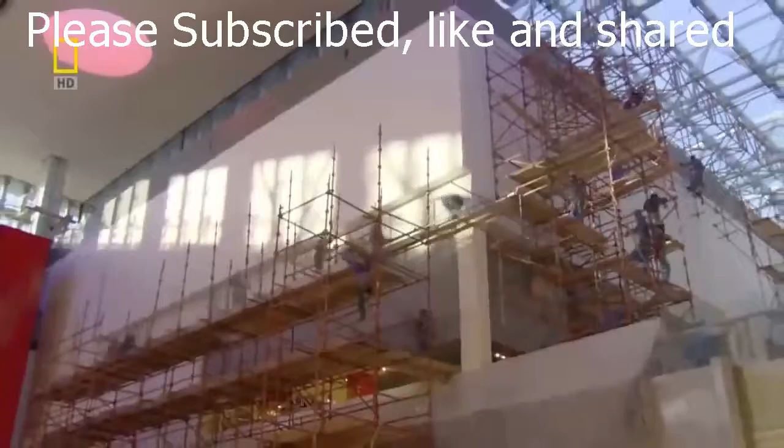He's determined that the mall will open on time. It's already missed 2 deadlines. If it misses a third, well, that's down to him. But of the 1,200 shops due to open here, only half are occupied. Some just haven't been fitted out yet, and some have yet to be leased. What looks to us pretty much like a building site, to Bob is a diamond in the rough.

Nobody goes home until 1 o'clock in the morning and everybody's back at 5. Overall, the entire community has come together to cooperate and give us the opportunity to open the mall. It's going to be very exciting. We're going to have SWAT teams that are set up and positioned around the building. We're going to invite the public to come in. Traffic is going to be a challenge. We're anticipating some 50,000 cars every day.

The thousands who thronged the mall when it eventually opened will never know the real story of those frantic final hours. They would have come to see a mall worthy of Dubai. Opulent spaces and shops, row upon row of them. There's a vast aquarium to wonder at, with a massive acrylic viewing panel bigger than any other in the world. There's a full-size ice rink in a city where outside temperatures can top 40 degrees.

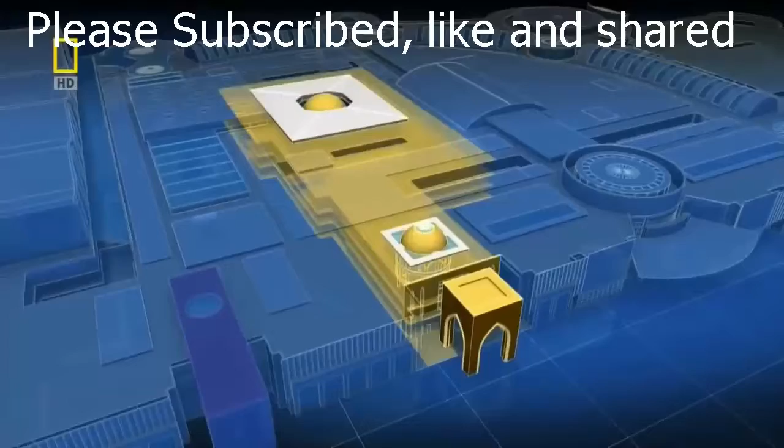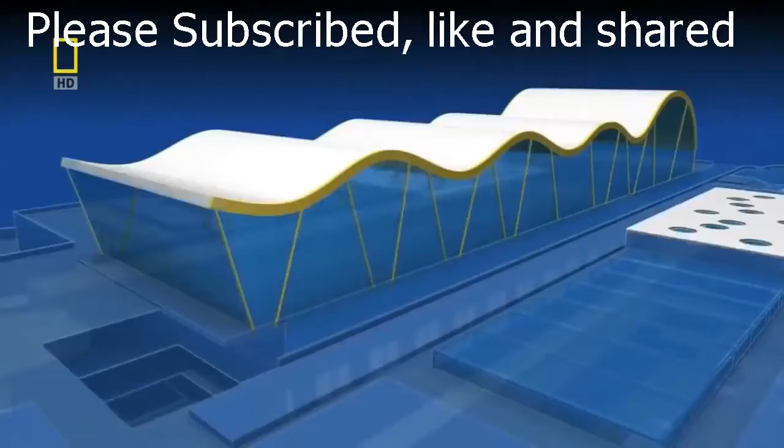The mall is so vast, it was assembled out of 37 conjoined buildings. It boasts an old-fashioned Arabian souk, a world record-beating aquarium, an ice rink, and an entertainment center complete with a roller coaster. Stretching over 1 square kilometer, it sits on a mega floor space that beats the reigning mega mall in China and dwarfs the Mall of America hands down.

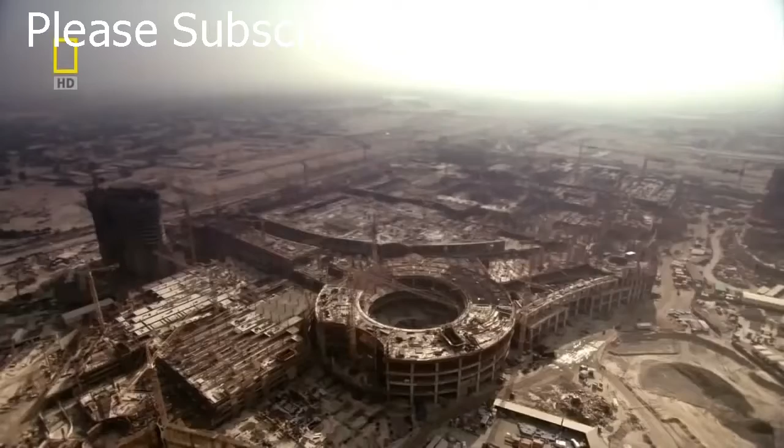Two years back, and a formerly empty stretch of sand is being turned into this retail palace. The project is badly behind schedule. Going by best laid plans, it should have opened by now. Angeline Chan, chief architect, is on one of her regular visits to the huge spaces that she's helping to create. Future ceiling heights for the tenants. Let's go see the precast panels. It's bigger than anything she's yet done. Probably the job of her career, with some touches she's particularly proud of.

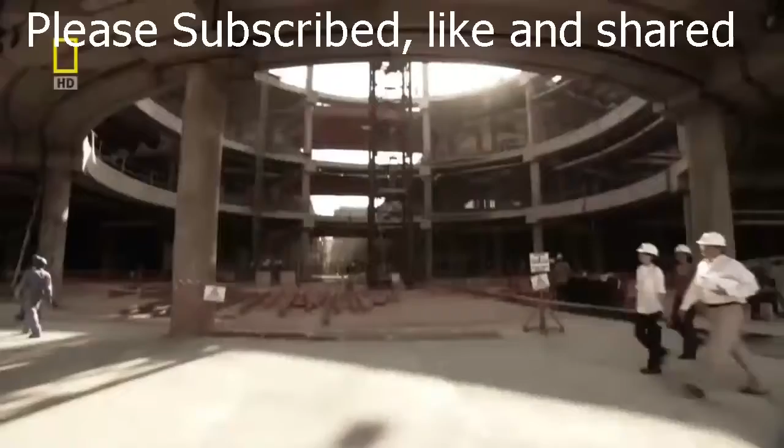I think my personal favorite spaces in the whole mall are all the atrium spaces. The atrium spaces, the 3-story high corridors, even at this stage, when you walk around the mall, and finishes aren't even in yet, you can feel the majestic spaces that surround you. I'm just left in complete awe.

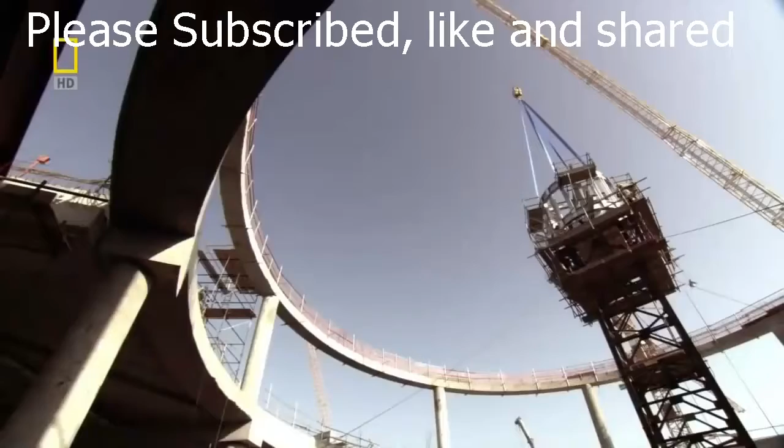There's no time for her to relax and enjoy the view, though. Every time she comes here, there are technical challenges to be faced. The knottiest problem, to get column-free roofs over the vast atrium in place on time. So what's the contractor promising us now? You're probably looking at about February next year for this. The biggest challenge that we had to face is time. We're given the task of building this mall in 28 months.

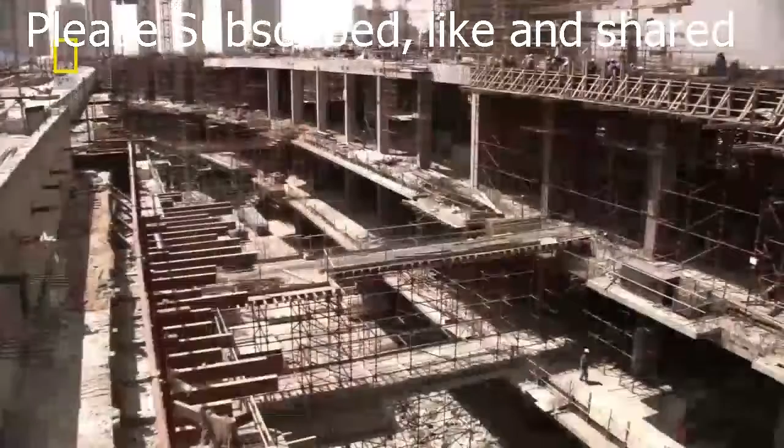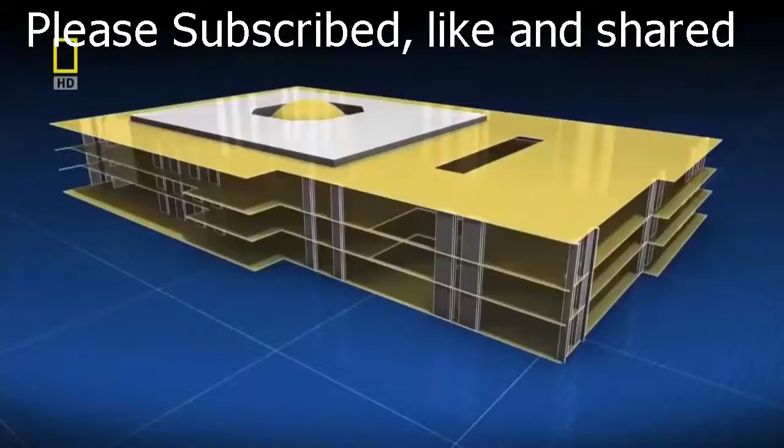Months behind the original schedule. It's not just the open halls that are causing problems. The whole design is throwing up challenges for the architect. The complex has been designed as 37 separate buildings. Local codes say all structures must hold up against earthquakes up to 5.5 on the Richter scale.

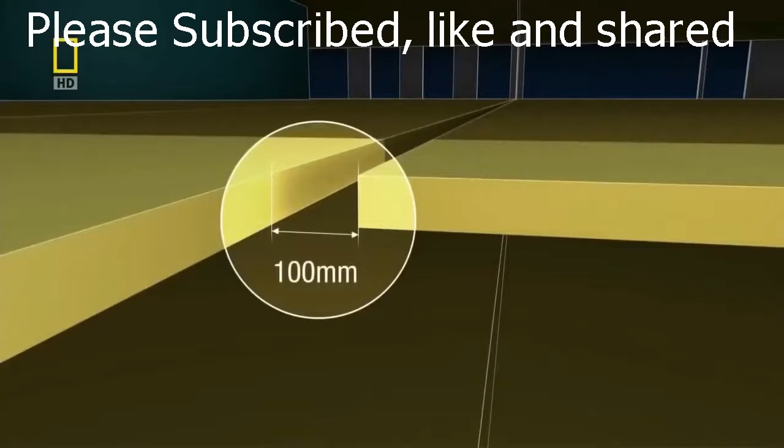So each building is reinforced by shear walls that withstand lateral force. A side-to-side motion won't bring it down. A 100-millimeter gap between each building not only allows for expansion in the desert heat, but if one should fall in an earthquake, it won't bring down any others with it.

While Dubai does not stand in a high-risk area for earthquakes, the disaster in Bam in nearby Iran was felt even here. In 2003, that devastating quake left 43,000 dead, 30,000 injured. Many perished as buildings collapsed. In Dubai, no one is taking any chances.

More than anyone outside the royal family, one man is responsible for the shape of modern Dubai. The Director General of the Department of Economic Development, Mohammed bin Ali Alabbar, known universally as the Chairman. Everyone on the Dubai Mall project answers to him.

So you can give me a discount. Our rates compared to them is very reasonable. We will work together. I appreciate it. I will do all your rates, I need open your book. Open book. I'll do open book with you. Fair? Fair. But the chairman is nothing if not a hands-on boss.

It means he comes up with changes to the design. Today, he's not too pleased with the fountains he's paying top dollar for. Last week we had to decide that we're taking some walls out, some water feature that, in my view and my management view, was obstructing fountain views. We're putting beautiful restaurants overlooking this $100 million fountain. Can you please take the wall down and let them see the fountain?

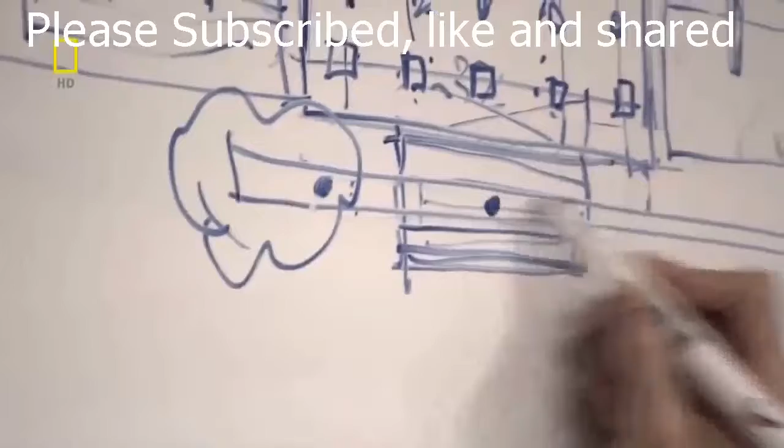Back at the site, Angeline has to break the news to the construction head, Jim Scobie. We've been looking at this for about 6 weeks, 2 months. So it's been 6 weeks? What we'd like to do is, if we can go ahead and redesign this quickly and get it to them. Okay. So the next time we meet Sistra... For a minute there, it sounded like a plan. Oh, really? But there's a catch.

Whatever we design, and we're probably coming up with 3 alternatives, has to be presented to the chairman and all that. Angeline tries to make light of it. No, just do it in between the piers or something. She always finds a way to make the changes the chairman asks for. So it might be some sort of lightweight canopy structure. And you just hang around here, you sip coffee, you listen to the water, this nice sound, and then birds chirping. Today is a good day.

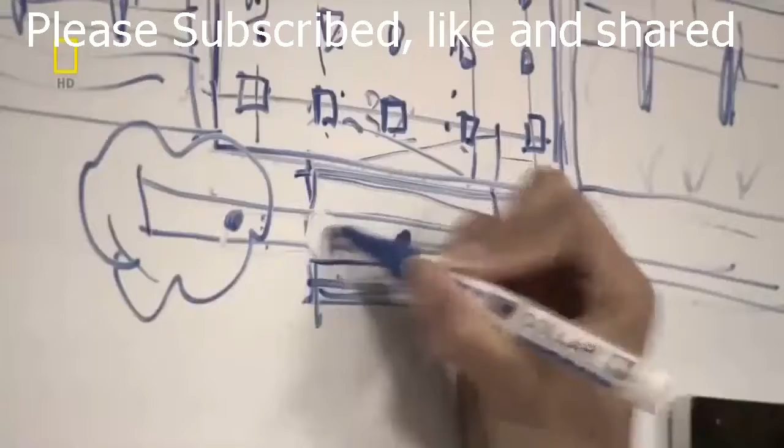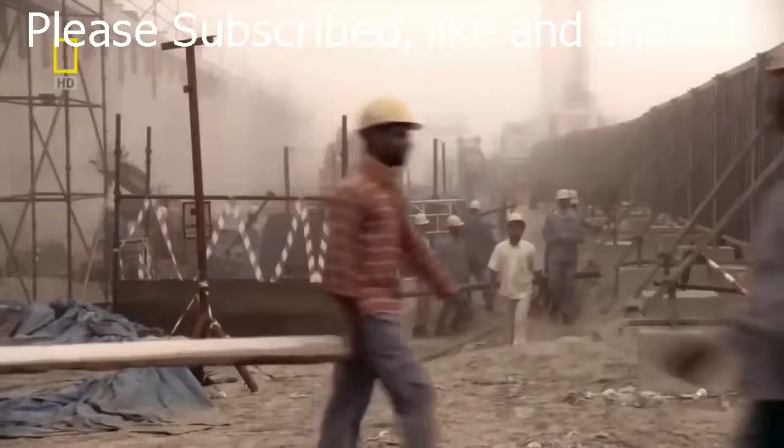Everyone politely goes along. Pretty much an impossible task. People haven't done anything this size this quickly before. And if this wasn't enough, there's a sandstorm approaching. The Dubai Mall, largest in the world. It holds 95 elevators, 150 escalators, with plans to attract 30 million visitors in the first year alone to its array of glitzy shops.

At its center is the aquarium with 400 sharks. In total, more than 33,000 marine creatures can be viewed through a panel so large, it's in the Guinness Book of World Records. The chairman made sure of that.

The size is important, but it doesn't really shake me. But yes, I want to know how big it is, what's in there, how many species. So they say, we've got 33,000 species in this thing. We've got 400 sharks. Say, okay, now we're talking. The task of constructing this monster mall has been an epic. It's still nowhere close to opening day.

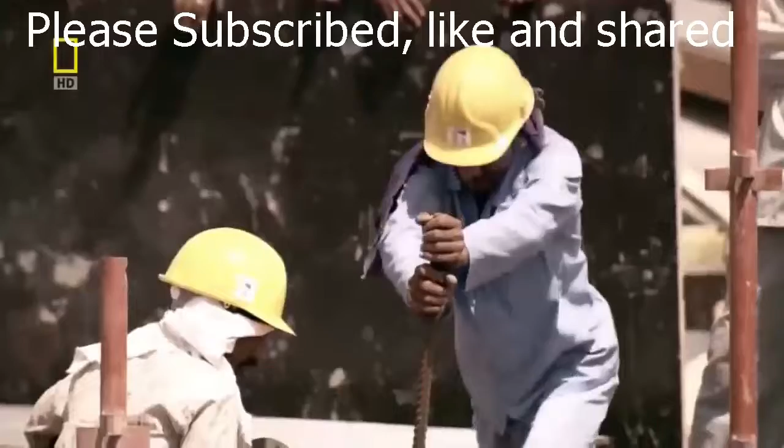Every day, the night shift of 2,500 workers heads for some well-deserved rest. The day shift of 10,000 workers picks up its tools. It's tough work in the raging heat of the unforgiving sun. Temperatures in the desert emirate can hit over 40 degrees in summer. Heat exhaustion is an ever-present danger, especially for a foreign workforce, acclimatizing to the local weather and the demanding schedule.

Currently, the work on site doesn't stop at all. It's 24/7, 24 hours a day, 7 days a week, during summer, during winter. People say, the difficult we do quickly, the impossible takes us a little longer. And that's what we have to deal with here until you say the chairman's coming and then they say, oh, we'll get her done.

The chairman, Mohammed bin Ali Alabbar, is responsible for some of the shiniest new buildings in Dubai. And today, he's coming to the mall for a viewing. He likes to be hands-on. Please, again, I need someone to trim these palm trees around the square. Still, dead leaves are hanging. Yeah? Okay. And I'm very bad. I pick bad things easily with my eyes.

On another trip, he noticed the colored panels on the facade of the gold souk were not to his liking. I think it was maybe a little too dark. So I said, these shades are not matching from the main road. I said, it will reflect badly on us. I think they had to take the panel down and probably replace.

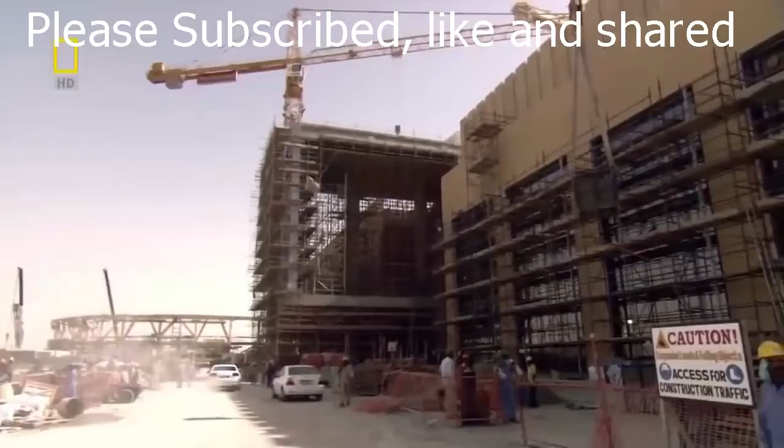Once it's completed, the mall will open onto a boulevard on the scale of Paris's Champs-Élysées. Now the chairman wants to see how the grand entrance to the mall is progressing. He wants to be sure it'll make the right impression. Obviously, his arrival is treated as a bit of an event, and he's ushered to the high atrium just inside the main entrance. It's going to be a highlight. I believe that about the maintenance issues and all the rest, but when we check and they're ceramic, they're going to be very, very nice.

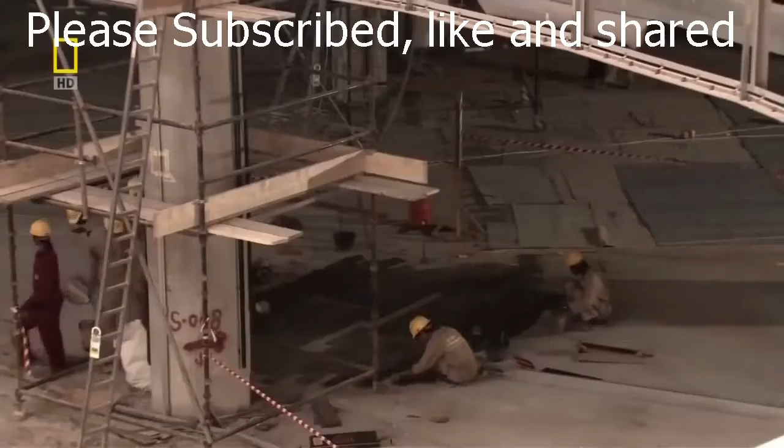He listens knowledgeably to the explanations of the decisions being made. The boss tries his best to be enthusiastic. Also, 3 areas. Then he zeroes in on the details. All your columns are finished one color, huh? Cladding, yeah, cladding. Okay. Thankfully, he doesn't notice anything he absolutely has to change. I think a little bigger would have been also okay. Building 11, 12, we are at building 10, building 15, 23, 26. This is just amazing. As one building.

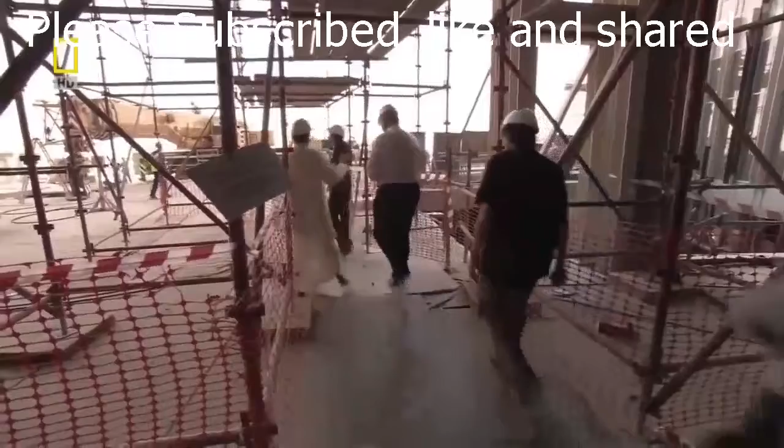Well, I just want to go and shake every small guy's hand. We'll put it together brick by brick. We'll put in the granite floors. I feel like I want to do the opening so quick, and the opening should be for them. Thank you, guys. In another part of the mall, the little guys are frantically rushing for opening day.

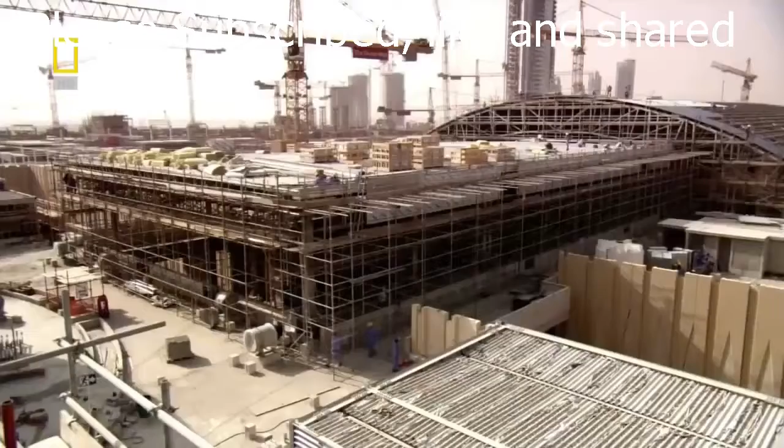One of the most important attractions at the mall will be the aquarium. Once done, it's designed to impress. That means it's going to have to be big. It will hold 10 million liters of water, equivalent to 4 Olympic-sized pools, and acrylic panels 750 millimeters thick will hold back the enormous pressure of the water. By heating and cooling the panels, the joints will disappear, creating a single panel so big, it'll make the Guinness Book of World Records.

The centerpiece of the aquarium will be a transparent tunnel 48 meters long. Sitting at the tank floor, 10 meters down, it will be subject to immense pressures. Iron rings help to keep its shape. It has used up the entire supply of acrylic from 2 factories for a year. It's had to be precision manufactured in 4 massive pieces. And each giant piece weighs 32 tons and is extremely fragile. So moving them requires care.

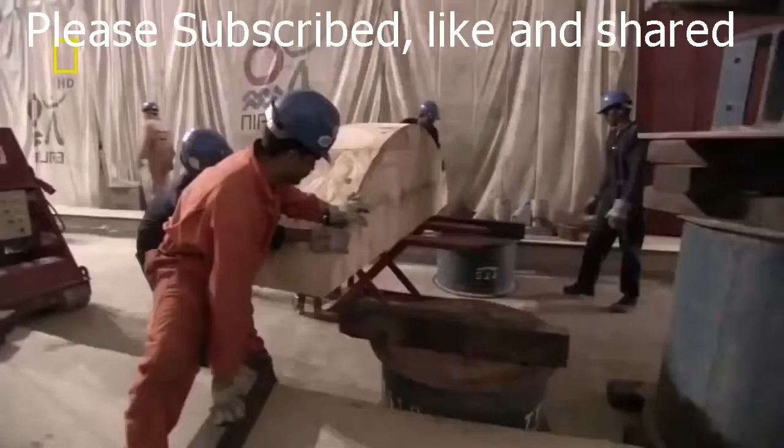A single wooden rolling jack is called in. The plan is to hoist the tunnel in, roll it along, and place it in position. Sounds deceptively simple. The aquarium is the one that we're all nervous about. If something goes wrong, the lead time to fix it means going back to the manufacturers. They're in different countries and they're many months away from reproducing and reissuing. See the play gap inside in the wheel.

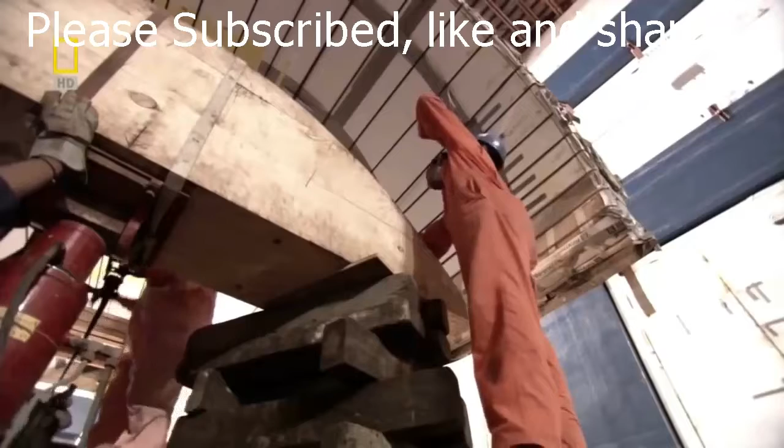It's all done under the watchful eye of manager Peter Knapp. It's the first time anyone here has attempted anything like this. Everything is done in slow motion. Even with something as large as this, there's little margin for error. The skilled workers build up the supports to level the jack before it inches up to take the weight of the tunnel.

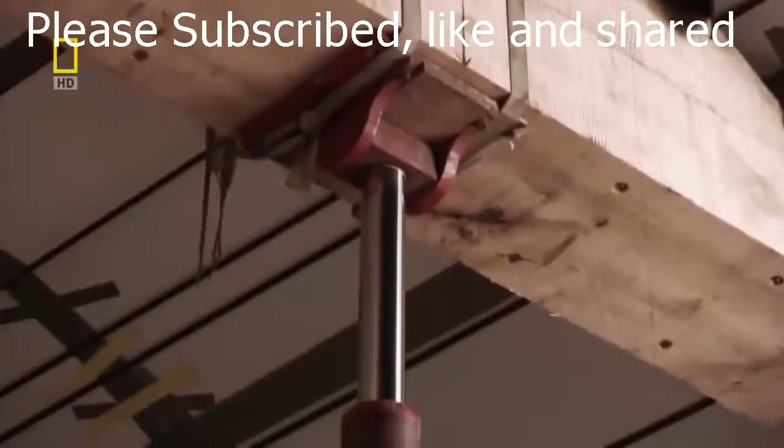The tunnel lifts into the air all right, but soon the crew spots something. The tunnel is distorting under its own weight. The pressure has forced the sides to curve inward. If they set it down now, it will shatter.

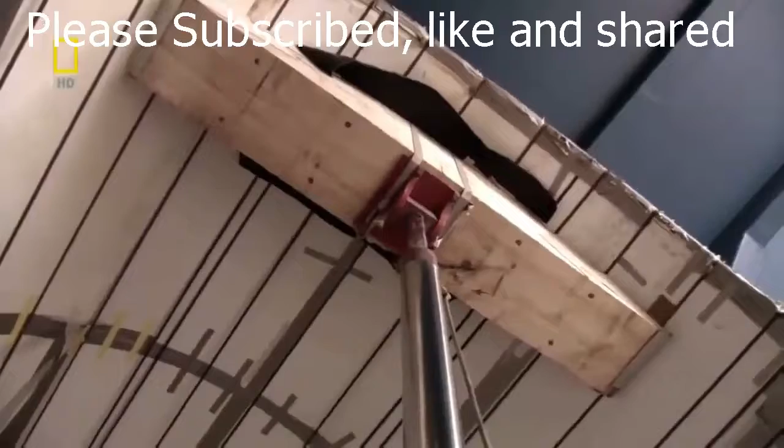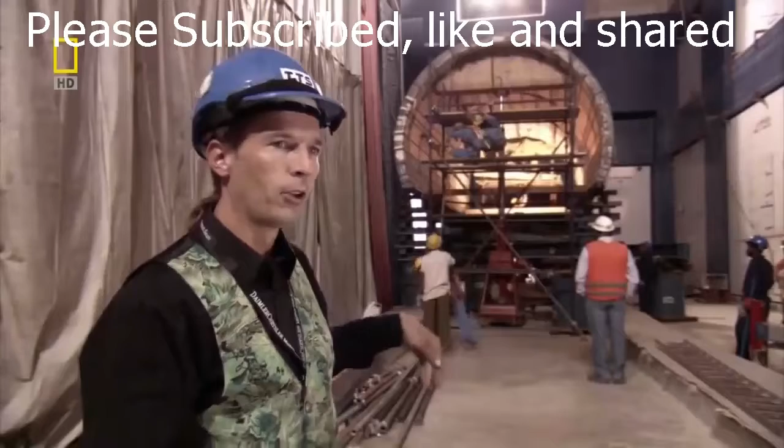My worst nightmare is if it were to fall and it breaks. They're building this in the States. They have a fabrication time of a number of months. It takes a number of weeks to get here. Because we have to bring the tunnel back in, there are things outside that cannot be done until the tunnel section is here. So the entire project, or part of the entire project, is going to be delayed for half a year to a year.

Dubai's not shy about flaunting its extravagant projects, such as the world's biggest man-made island, the Palm Development, home to many of the world's rich and famous, and some of the highest property prices. Oil money has been pumped into the famous Burj Hotel. Now the mega mall is rushing to join a Dubai being rebuilt for a day when the oil money runs out. And as always, no innovative job is without risk of delay, even if it's from a simple sandstorm, which cuts down work to the bare minimum.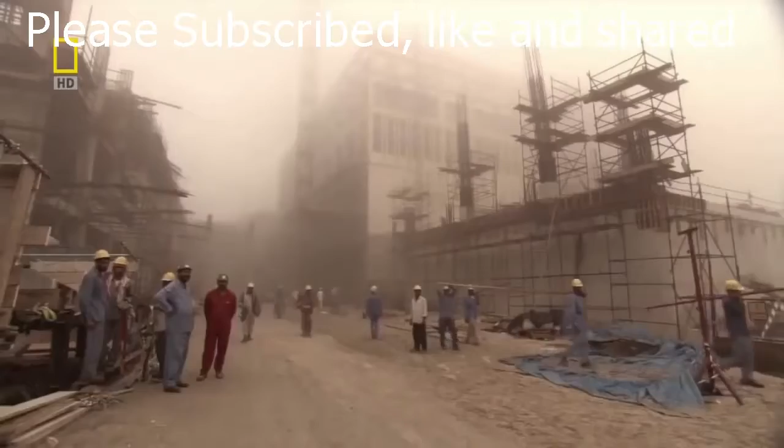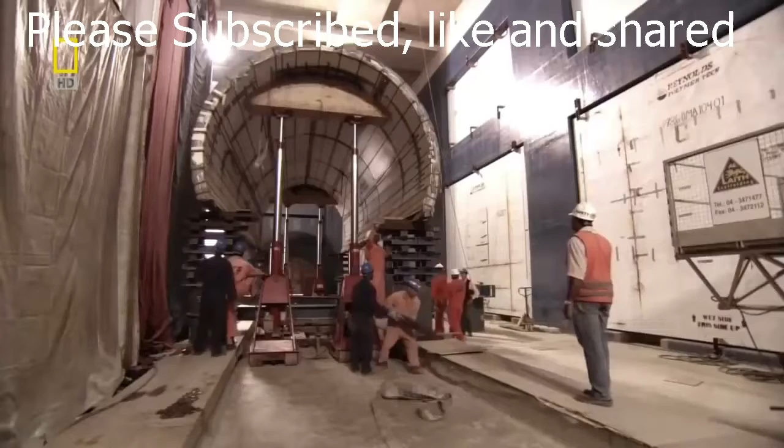The next day, after a night of head scratching, they've come up with a new idea to move the aquarium tunnel into place. In theory, the plan should work. The measurements add up. So they spread the load, and the tunnel is now balanced across 2 separate jacks. The supports come down piece by piece, and slowly the tunnel inches downwards.

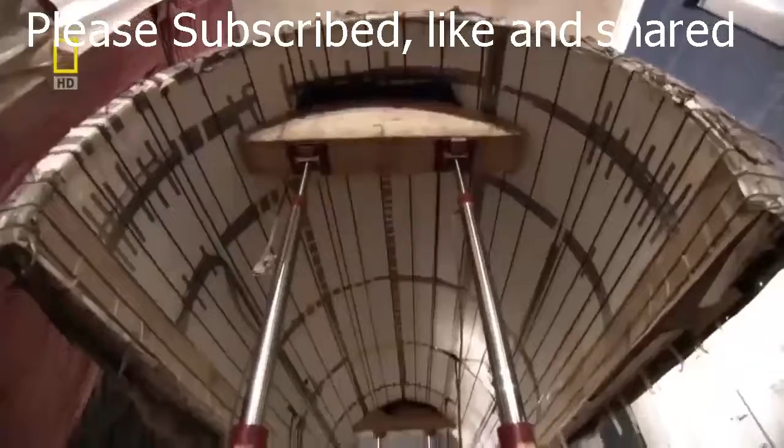But just when they think the plan is working, the crew notice that the jacks are out of sync, and their load is coming down at an angle. The pressure of 32 tons of acrylic is concentrated onto one corner. If they try to set it down, the edge will snap off.

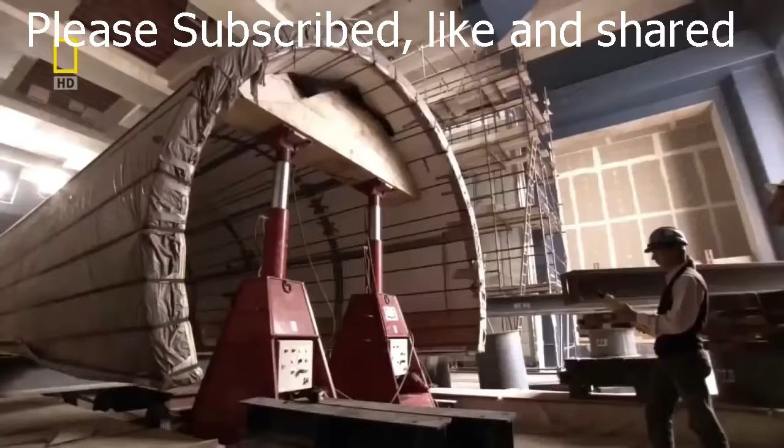It's not an easy job. There is stress because if something goes wrong, there's consequences on it, so that does put quite a bit of stress on you. Peter keeps at work, adjusting with his control units, balancing the two jacks carefully, keeping the tunnel straight. After 8 hours, he thinks he's got it right. No one knows for sure until the tunnel hits bottom.

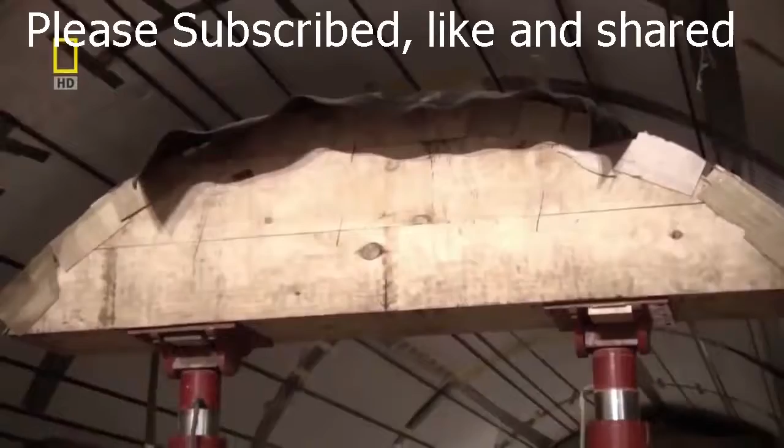All that remains is to haul it into place with a rather simple lever and pulley system. Only another 3 pieces to go. When they're all in place, they will be welded together, made watertight, and covered with 10 million liters of water.

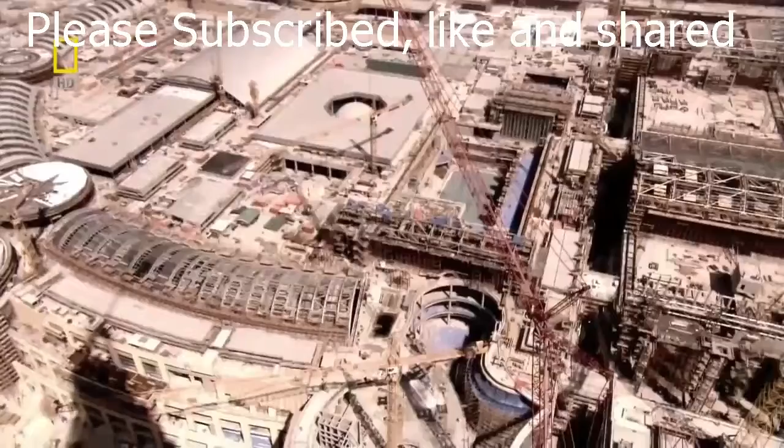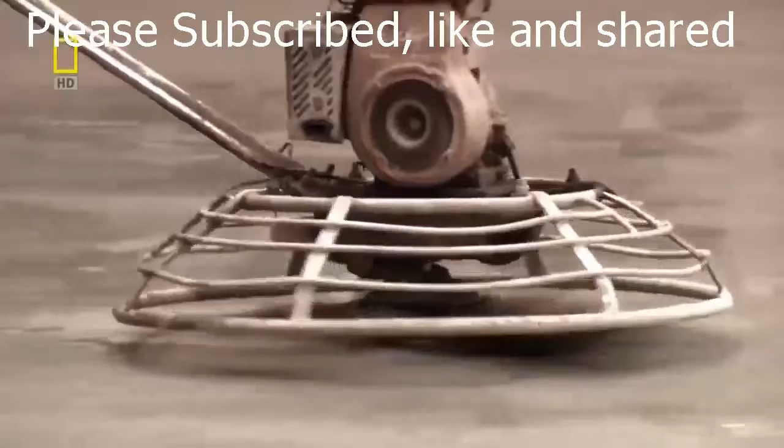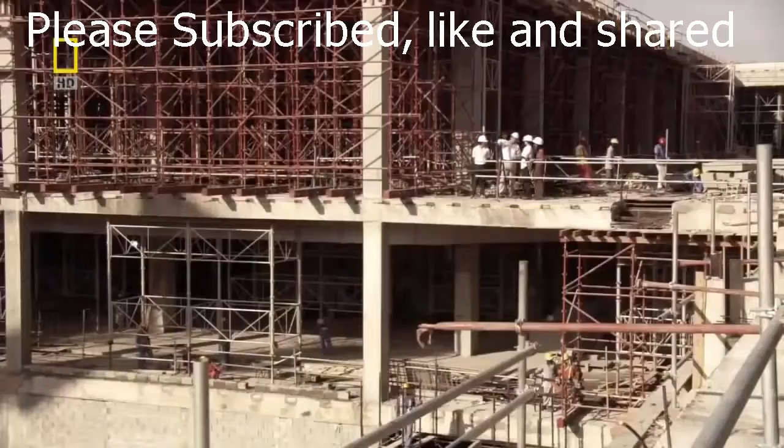While the aquarium is taking shape, architect Angeline is focusing on another of the chairman's ideas, an Olympic-sized ice rink. Layers of concrete are going down and being smoothed off. Even at this level, below the surface, bumps will mean uneven ice. Angeline has come back to talk the roof through. The rink can accommodate 400 skaters at a time.

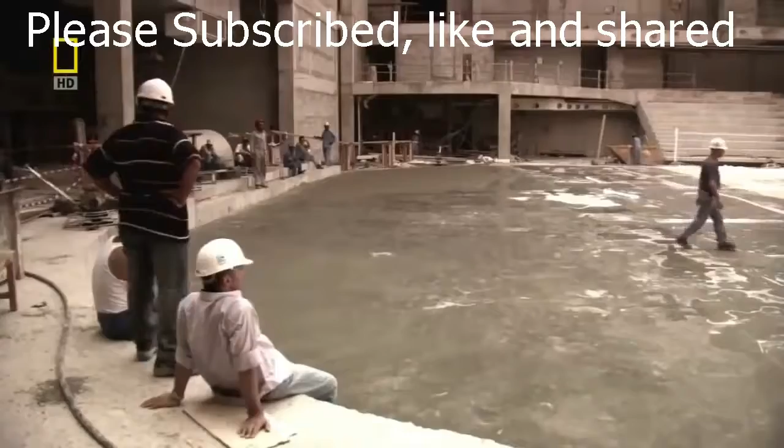So the roof is going to be massive, and they plan to use natural light, creating a Swiss cheese structure with the desert sun beating down through 60 skylights onto the ice below. About the impact of the sun, the studies will be coming back in a couple of weeks' time. I think the worst case scenario is that we may have to introduce film to just take maybe 5–10% of the direct sunlight off. The sheer heat could be a problem for the ice.

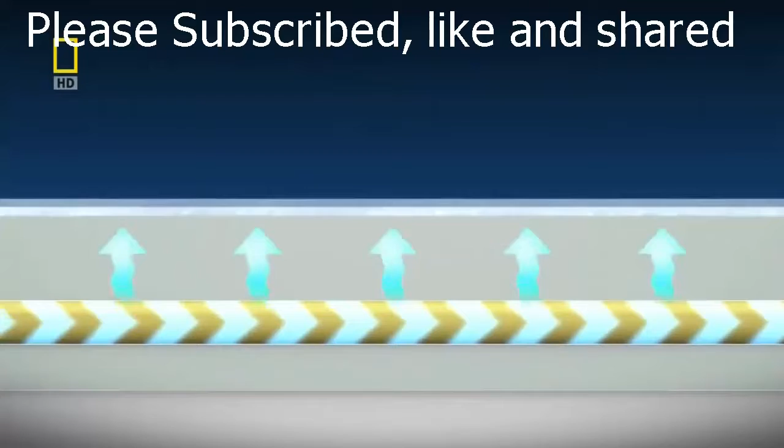An ice rink is rather like an ordinary fridge. Pipes are laid through the concrete. Cold glycol will be pumped through them from refrigeration units. This will freeze the concrete, and then the ice will be built up on top of it, layer by layer. But having skylights above means the ice must be kept 2 degrees colder than a rink in a temperate climate.

Everything on this site is geared to breaking records. You need cranes to shift all this big stuff around. In fact, there's been so much construction in Dubai that it's said that up to 1/4 of all the world's stock of cranes can be found here. The biggest at the site is the Demag 2800. There are just 50 of these 600-ton monsters in the world, and they're only called in for jobs that no other crane can take on.

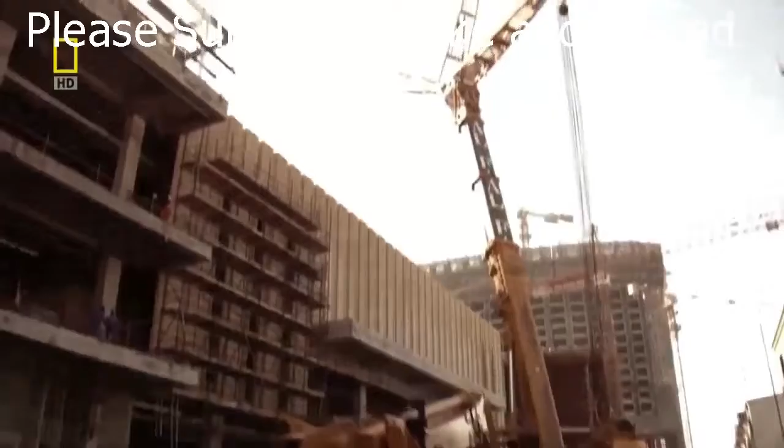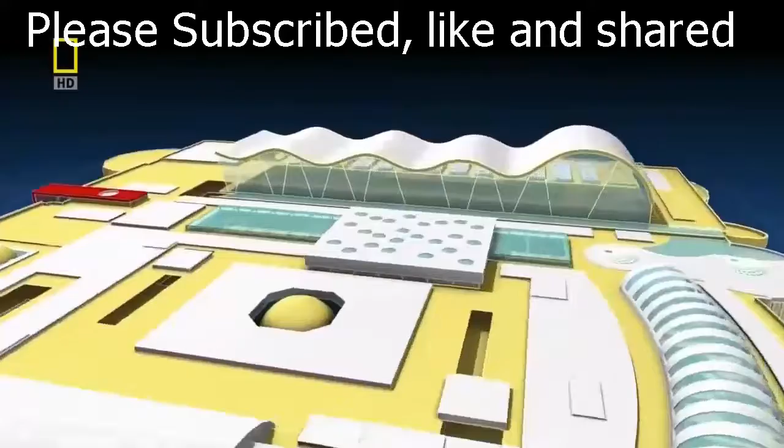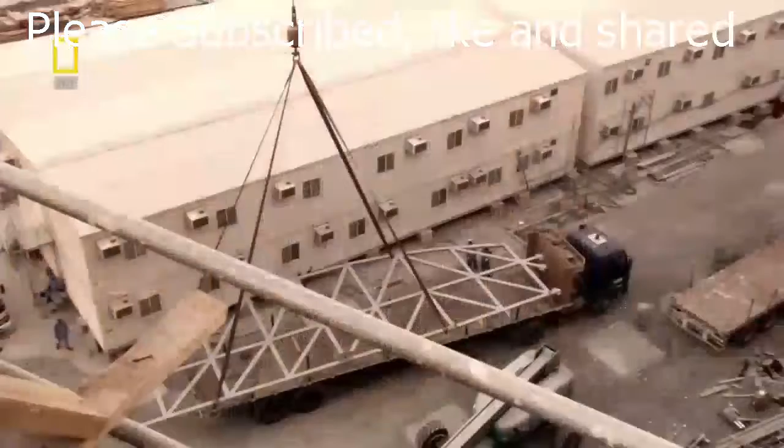Somebody hurry, they want the job in a hurry, but the machine cannot move like this. Patience, we need this heavy crane first. George and his Demag have been called in today to start lifting the pieces for the roof of the entertainment complex. Each load has to be lifted one by one. A job which requires all the patience and experience George has gained in his 26 years with his crane.

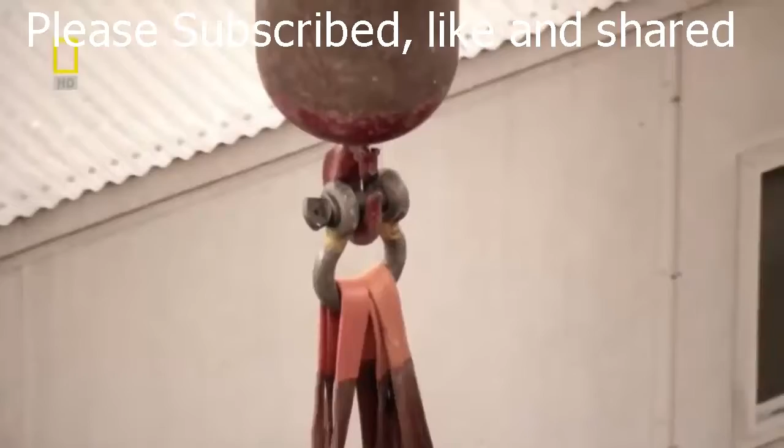Some people are angry, some people shouting. That time we want to keep silent like that.

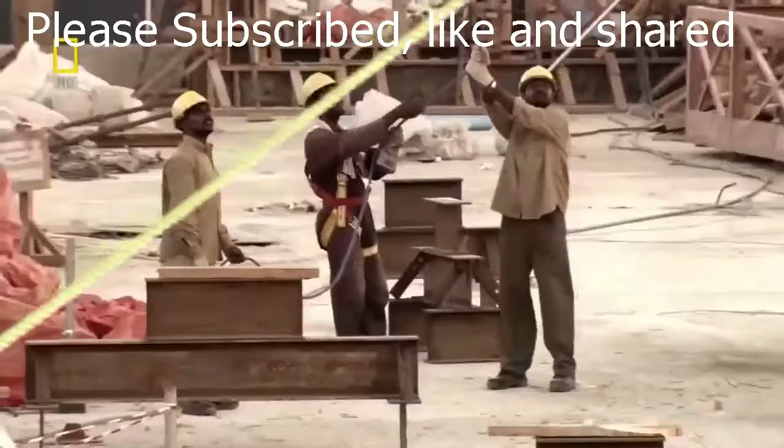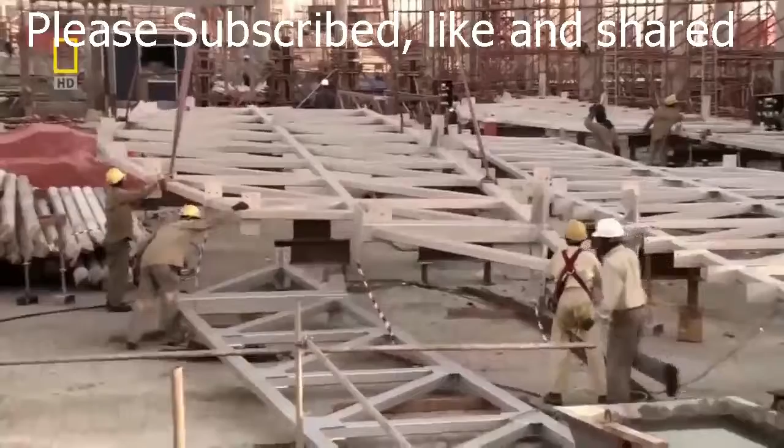The roof of the entertainment center will be put together like a giant jigsaw puzzle. Supporting a huge span with no columns below is difficult enough. But this roof has thousands of pipes, beams, nuts and bolts. Because in Dubai, they not only like things big, they like them complicated.

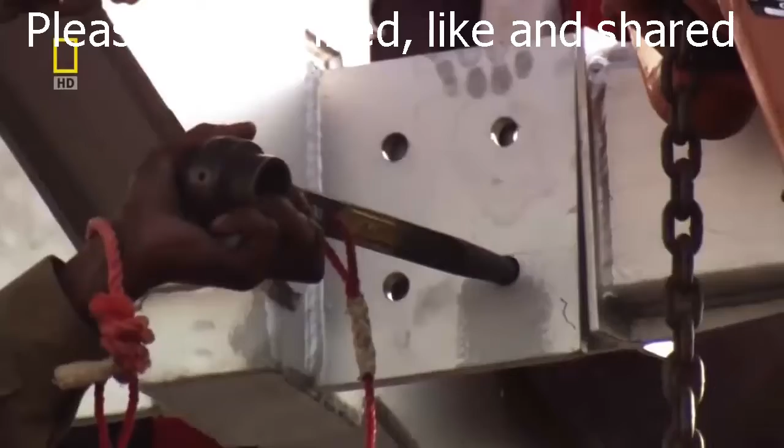The easier way would be to build a simple flat roof. But this will have an undulating design, which means that not only do the trusses and joints have to be rock solid, but they're amazingly complex. Each piece has to be designed and manufactured individually. Of course, the design was a special request from the chairman.

Well, I think you should have a little bit of taste. So now we want to do something better. We want to do something creative. And the entertainment roof is just one of 69 roofs that will come down over the mall. It was one of the most complex roof structures that we've ever done, with the many skylights that we've designed, each different from the other. We were setting ourselves this huge task.

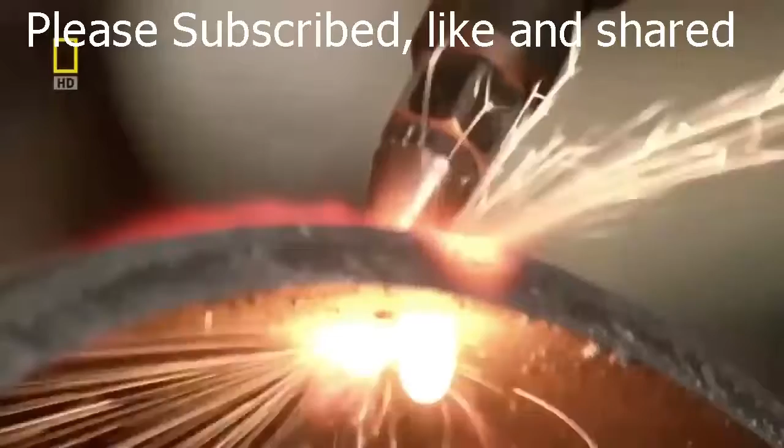One factory in Dubai has upped the number of machines, ramped up its manpower, and has been working round the clock for the last 4 months to get the roof parts made. Once the intricate computer designs arrive, the work begins. It requires a surprisingly fine touch. The hand of the operator guides the computer designs. Every hole, every cut, every weld has to be millimeter exact. Any mistake, and the pieces won't connect on site, and the roof can't go up.

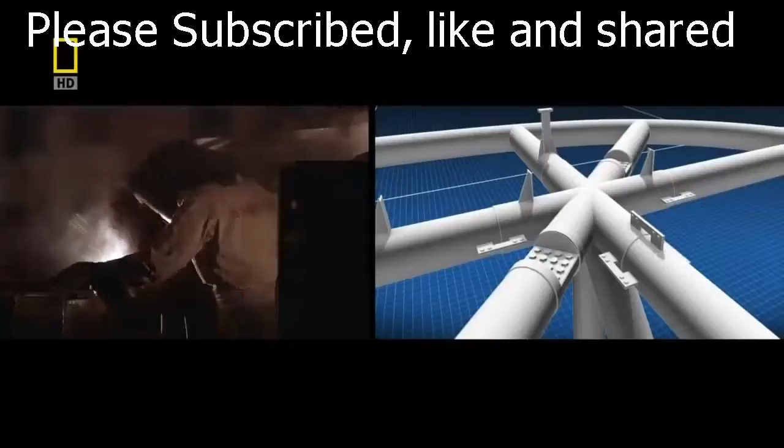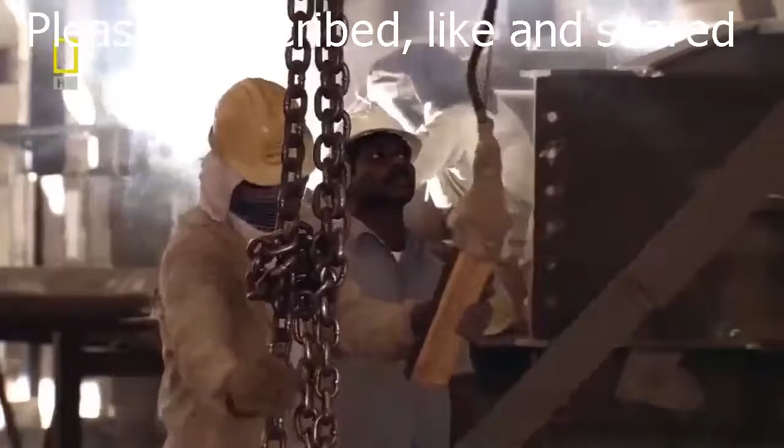By now, the factory should have delivered all 14 support pairs. But the schedule was over-optimistic, and only 5 have actually been delivered. Extra jigs have been fitted to speed up the work, though no one knows how soon all the trusses will be ready.

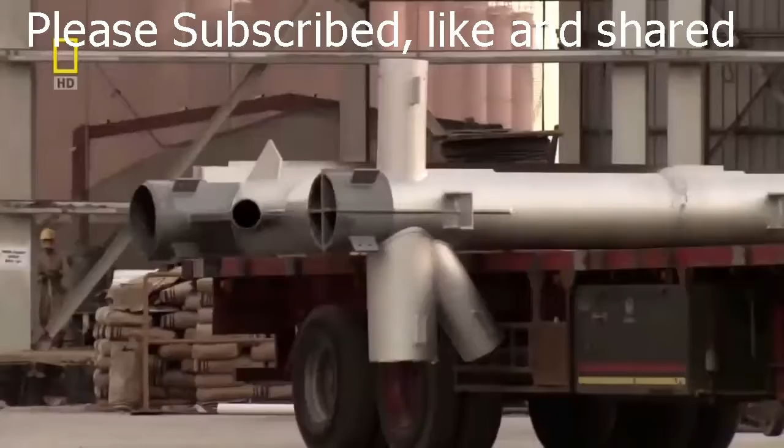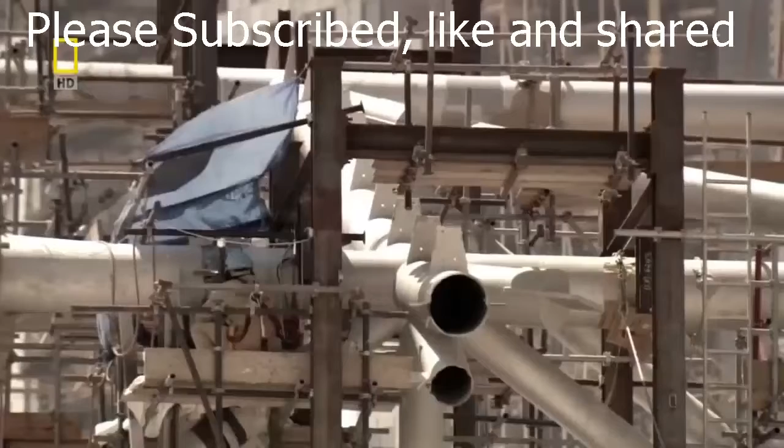Back on site, the trusses are delivered, and despite all the efforts of the engineers, they are proving hard to fit. And the structural engineer that designed it is saying it has to be dead on, we can't move anything. And the construction engineer is shrugging his shoulders at me saying, I can't build it. Many months after Dubai promised the world its largest mall, the roof has yet to come down.

For centuries, Dubai has been a trading post. The Arabs have long been seafarers, and Dubai was a prime stopping-off port on the route from India. Wander the streets, and you find many traditional shops and markets, the souks of Arabia. One of the most famous of these is the gold souk, where locals and foreigners alike go to buy, what else? Gold. Browse the stalls here, and you might even find a bargain.

The plan is to include an echo of the gold souk in the brand new 1 kilometer squared Dubai Mall. The souk is intended to be a jewel in the mall's crown, and no expenses have been spared to give it a touch of Dubai, right down to the temptations on display. We have a piece of iPod, pure gold, 18 karat, and it's with the 5-carat diamonds. We're talking approximately this one like $35,000.

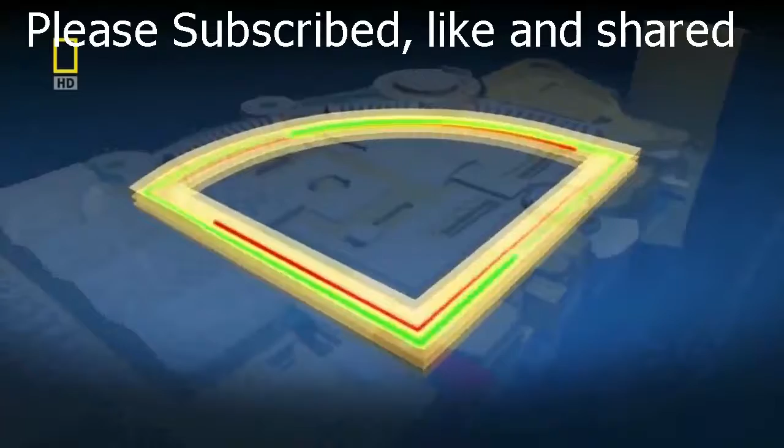Dubai Mall is basically a huge quadrant, so that's the circulation area that you move around. The loop keeps shoppers moving through the mall. With no side alleys and narrow passageways, people won't get lost and can spend their time spending money. And all shops get prime locations, meaning rents can be high.

For the less intrepid shopper, the architects also designed a shortcut through the loop. This leads past the aquarium, a landmark to help shoppers keep their bearings.

Simple signposting is enough to guide the shoppers from one atrium to another, and there's always something to look at. At off-peak times, these huge spaces could seem very empty, so every atrium is filled with things to look at to keep the mall feeling busy.

To tempt people to stick around, the prime way of doing this is strategic positioning of food and beverages, places to eat and drink for you and me. You try to put them where you can have nice views or where you can spill out into the open areas. Outside the mall, when the desert heat is less intense at night or during winter, the chairman's multi-million-dollar fountains have been designed to keep the diners lingering and tempting them to come back.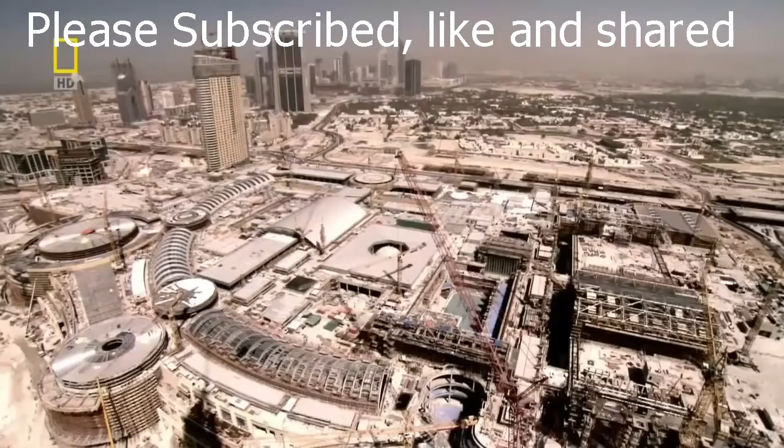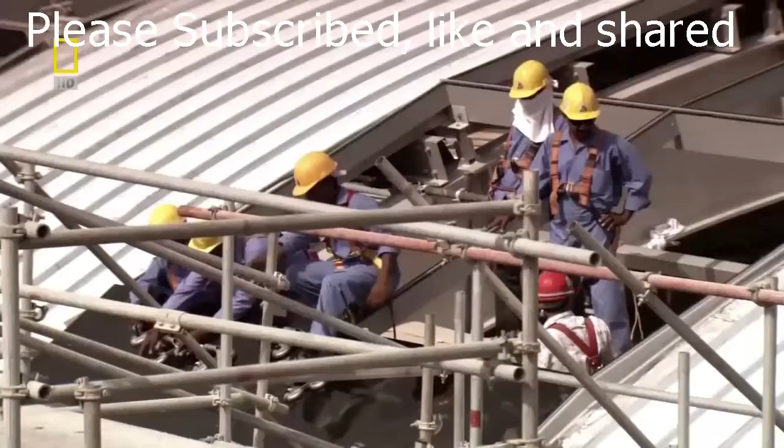During construction, the team of architects set its shoulder to the wheel, but even they couldn't keep the project from missing its deadline. Months past the mall's original date for opening, the roofs are still only going onto the individual buildings, each one different and bringing its own headaches with it.

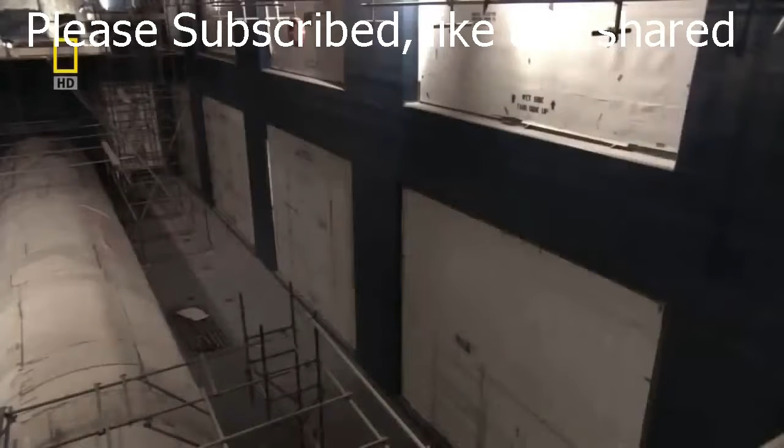The aquarium's viewing panels have been boarded up and sealed. Inside, chemical bonding with regulated heating and then cooling of the acrylic causes the joints to fade away. And the aquarium tunnel, too, is finally in place.

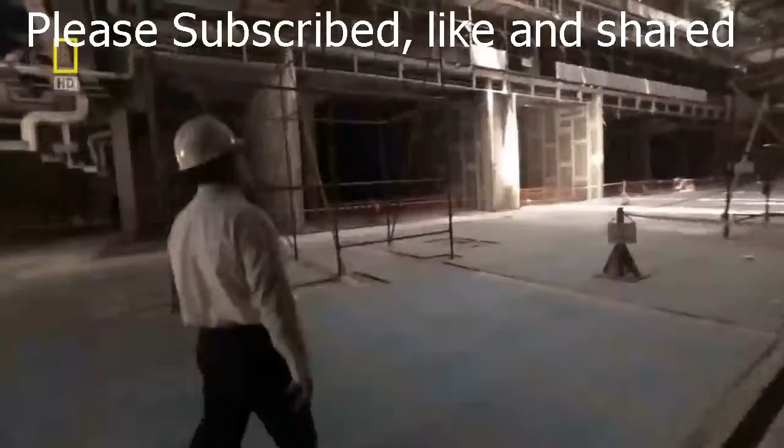In the meantime, the lead contractor has changed. Bob Fields is now in charge, bright-eyed and bushy-tailed. Hey Hank, can you send somebody over to tenant space GF 110 and have the graffiti removed from the wall? The structural steel's just been completed, so we're going to be cladding it and putting glass in it shortly.

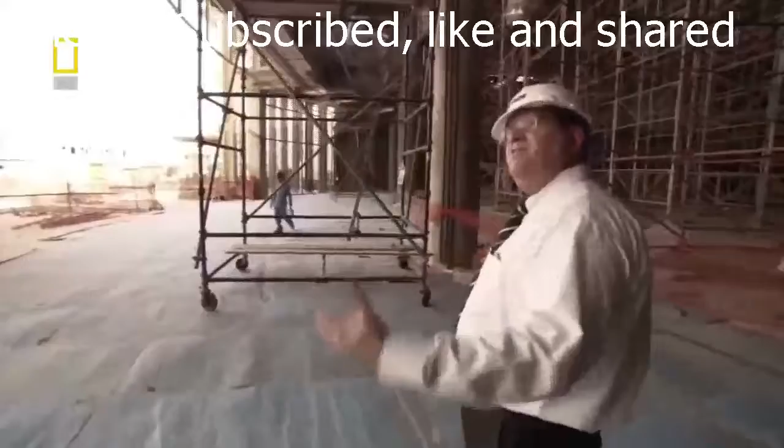But Bob is just getting to know how the chairman is running the project. We did have a chairman's meeting just a few days ago. We're still very much committed to June 30th. They also communicated to us clearly that we cannot miss the date. So I want to make sure that we get it done. All these guys are going to get it done, but I just want to make sure that they're all challenging themselves accordingly.

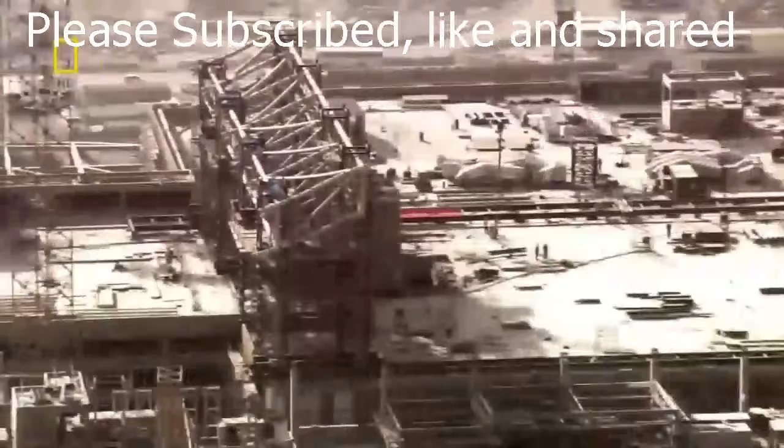But soon enough, he misses this deadline too. He's encountering problems: the trusses for the roof of the entertainment area have still been arriving late and imperfect. Now, these things are actually assembled in the shop, fully built, then taken apart and brought out here. But between taking them apart and shipping them and everything else, we end up with some very minor deficiencies - we're talking 3 millimeters, 5 millimeters, 8 millimeters, in the way the pieces are lining up. The structural engineer who designed it is saying it has to be dead on, we can't move anything. And the construction engineer is shrugging his shoulders at me saying, I can't build it. So I think we found a compromise, and I think it's going to work.

Bob's found his chief task is damage control. If a guy has an issue, he needs to come, because that's where the rubber hits the road. And that can mean banging heads together: you guys are all grown-up professionals, you know exactly what we're talking about here. This little conversation is for the third time.

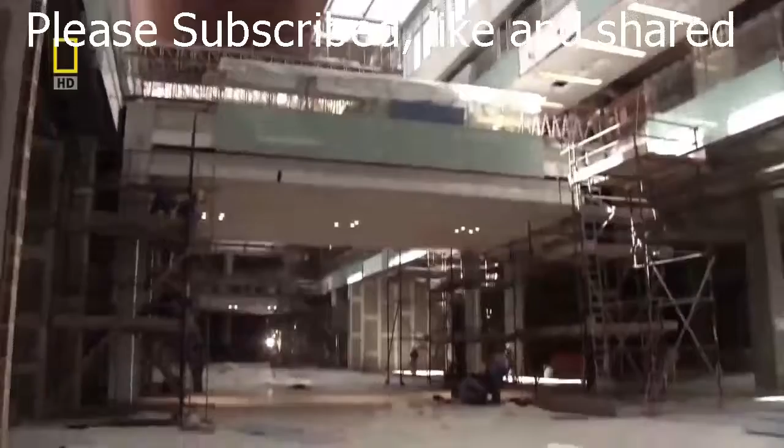Through threats and persuasion, the mall slowly gets completed. Bob's team has come up with ingenious ways to meet the deadline. They have set up a workshop within the site to make the fiberglass facade that'll cover the mall, so supplies are always at hand.

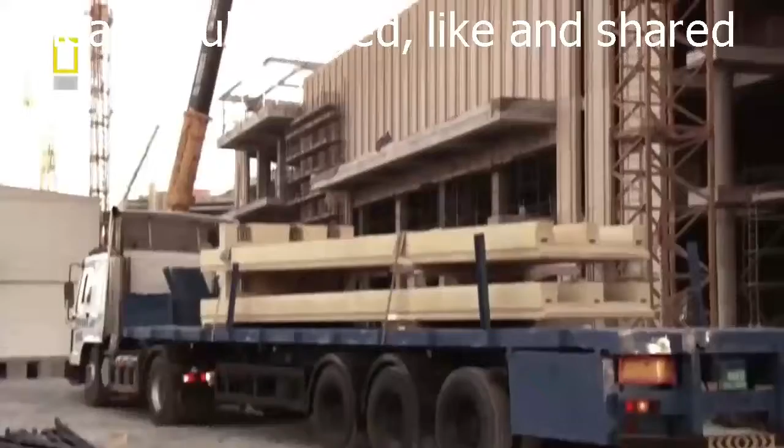But even as the finishing comes up, new complications set in. Everybody has to be very careful while moving in there. We don't need any damage to this, because once you damage it, we're gonna have to rip it down.

You hear what he's just saying? A lot of times a guy will come into a meeting and represent that everything's a problem - all the floors can't go in, all the ceilings can't go in. By the time you settle him down and nail him down, you find out there's only 2 or 3 issues.

The goal I set for finishing in June is absolutely obtainable, and we will obtain it. The difference between an optimist and a pessimist, or somebody that's negative, comes down to whether they understand what the work is.

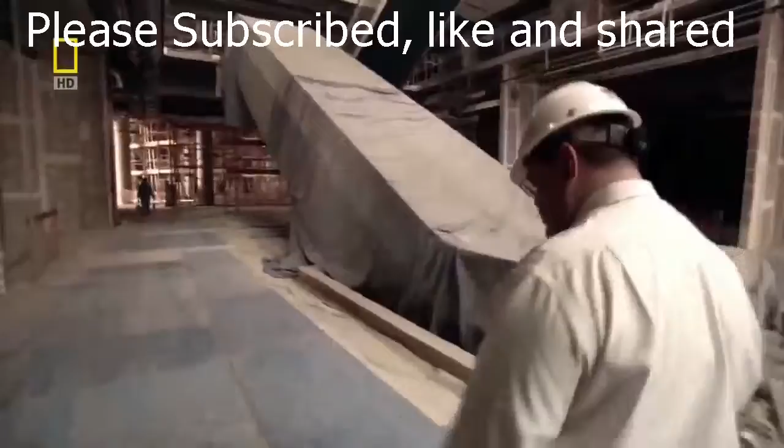So after months and months of war rooms, the facade goes up, the roofs come down, the mall slowly gets ready. There's 170 escalators in the building, for the 30 million expected to descend on its stores in the first year alone. Acres of marble and glass begin to dress the bare concrete. The souk is given its expensive finishing touches.

Finally, the mall can look forward to some kind of opening. It's been an epic struggle, but with one last effort, the biggest mall in the world should be able to fling open its doors in just 3 days.

You know, the world's watching, they have that expectation, and they're coming to visit the mall. Our challenge will be opening the mall, welcoming people, serving them, cleaning the mall, maintaining the mall, looking after the retailers, looking at safety, looking at security.

You know, I worry all the time. And maybe worrying all the time, well, that's why I don't gain weight. I worry all the time.

And he has plenty to worry about. With the press invited to an opening just 3 days away, few, if any, of the shops seem fit to open to the public, and 600, half of them, are expected to.

Even the gold souk, the mall's pride and joy, seems a long way from being ready. But the gold-colored panels the chairman wanted changed have been done, even if the boulevard isn't quite looking like the Champs-Elysees yet. But in any crisis, there's always the optimist.

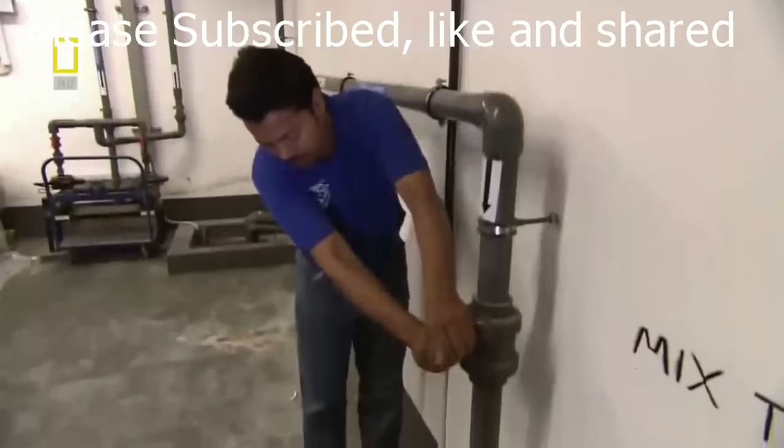Though it doesn't go straight in with the fish, Gulf water is salty. It has to be diluted, then cleaned and filtered.

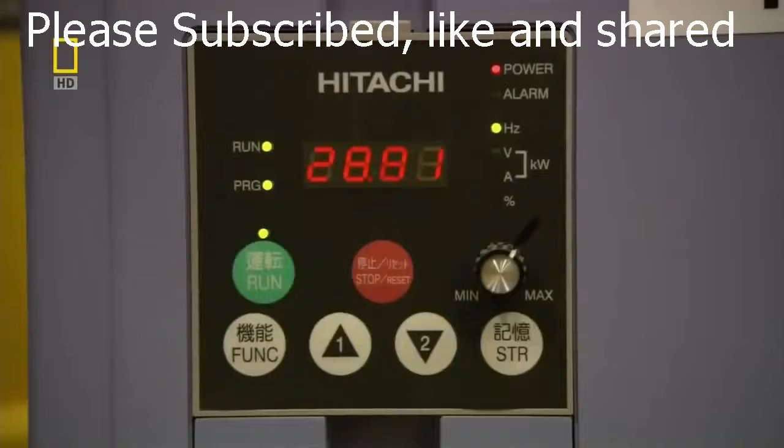Okay, so the area that we're in now is the life support system for the main tank of the aquarium. This is the heart of the aquarium where all the water is processed, cleaned, conditioned before reintroduction back with the animals.

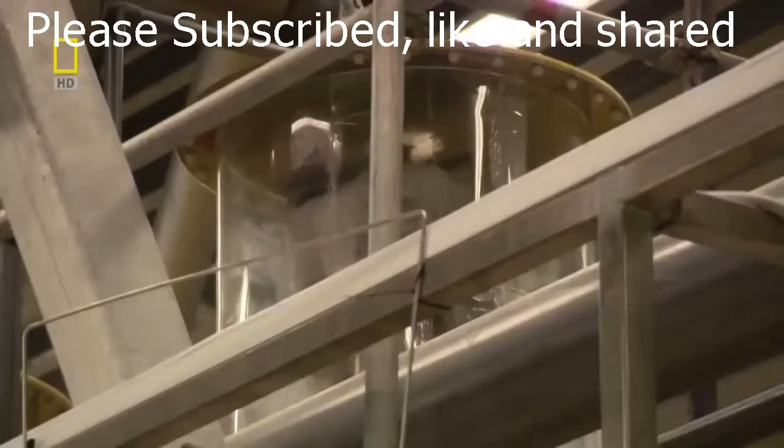The system monitors the oxygen content of the water, its acidity, the air and water pumps, the filters - everything is automated, and there are fail-safes built in. Nothing is left to chance when it comes to the fish's welfare.

So if, let's say, a pump was to fail down in the basement, and that pump was responsible for sending new seawater to the aquarium to top it up when we lose seawater through our foam fractionators, if that pump fails, it will send me an SMS alert in case I'm outside my office, and it'll also send an alert to this office.

With everything running smoothly, the aquarium looks set to be the highlight of the mall opening. When you go and you look at it, it really touches my heart. And then straight away I say, oh my God, I can see the kids? I want to see the kids running around this thing.

Against the odds, the ice rink has come together. The ice has formed, so much so they can even get the Zamboni out and smoothing off the surface, ready for the first skaters.

And so, it's finally the night before the opening. 12 hours and still a million things to do. One more night passes in Dubai, the city on the Gulf that never sleeps.

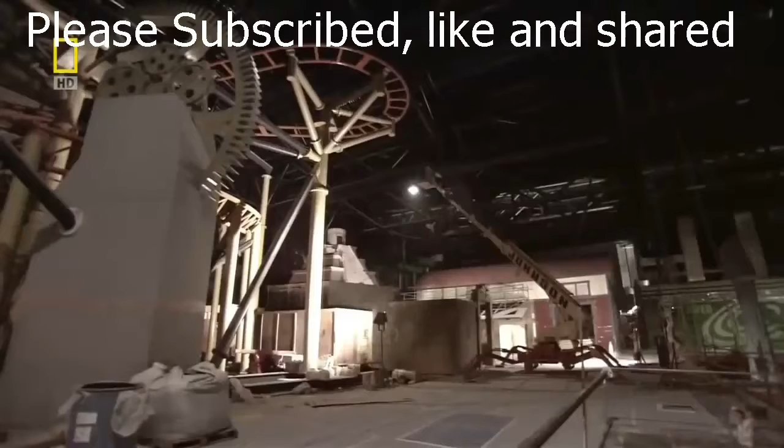Mock streets look down onto yet another construction site, though the track for the roller coaster is at least in place. It's going to take some while yet to fill this space and open it to the public.

Frankly, with the many changes, it's a wonder it's got even this far. The mall is open, it's functioning, and people are visiting. Opening any mall this size is a gamble, but one done in true Dubai style, it may yet pay off.